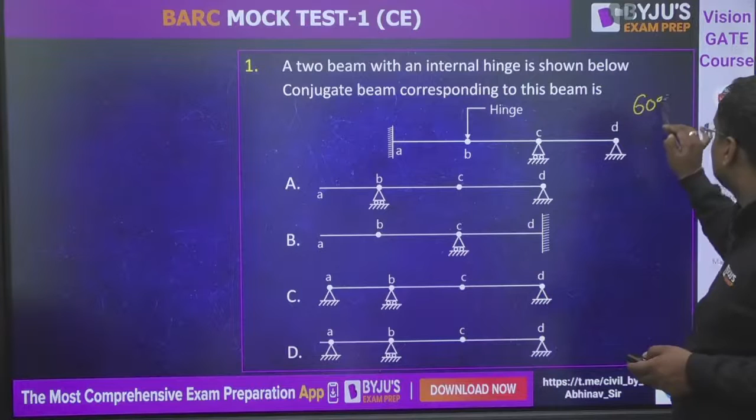Come on everyone. Two beam with an internal hinge is shown below. Conjugate beam corresponding to this beam is, what will be the conjugate beam? So guys, in the conjugate beam, fixed will be free. Internal hinge will be changed to internal roller, guys. Internal roller will be changed to internal hinge, and pin support will be changed to roller support. So A will be the correct answer, guys.

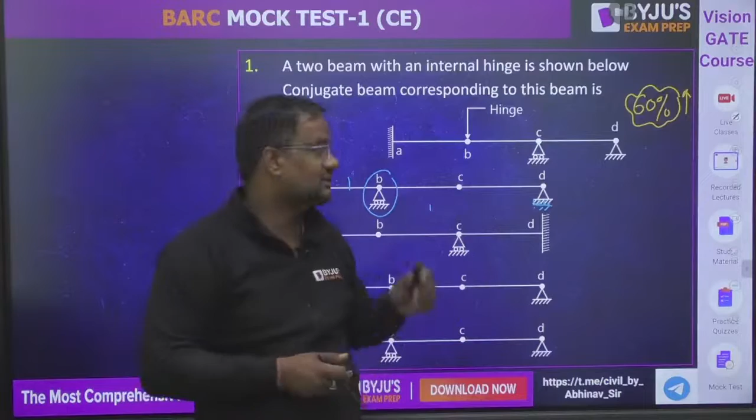Okay, now what to do from the conjugate beam, guys? Whatever the bending moment diagram, M diagram, divide by EI. So there will be M by EI diagram for this beam. Whatever is the M by EI diagram of this beam, make it as a loading diagram for the conjugate beam. Then at any point, whatever is the shear force, at the same point it will be slope in the real beam. At any point, whatever will be the bending moment, at the same point it will be deflection in the real beam, guys.

Now question number 2, and guys, let me make the statements P, Q, R and S. Option A is P and R is correct. Option B is P and S is correct. Option C is Q and R is correct. Option D is, no, it will be PQ or PS or QR or PQ. A, B, C, D option, guys.

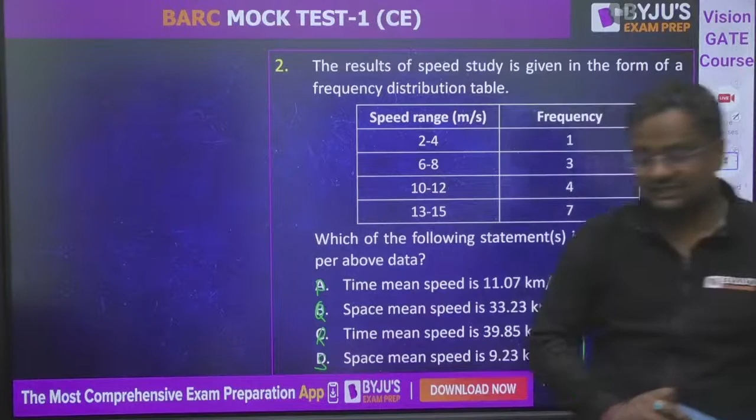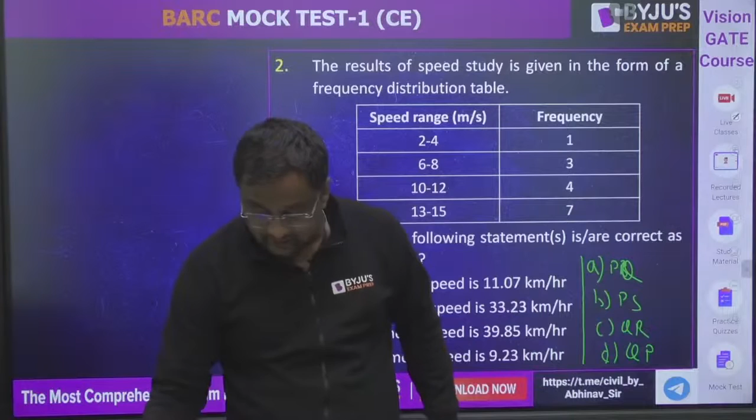Everybody on the comment section, please let me know the value of the time mean speed and the space mean speed here. You will be getting the virtual calculator in the exam as well. Aditya Vishwakarma has given the answer. What about others? And guys, in this particular question, I'm giving you a hint. Please take care of the units as well.

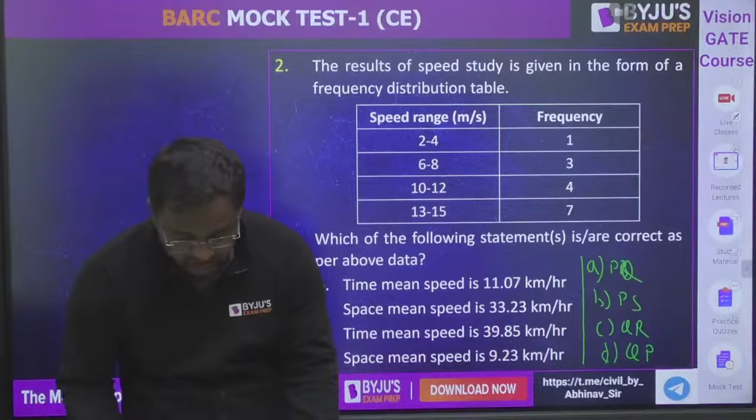So guys, time mean speed Vt: average speed can be taken here as 3, here 7, here 11, here 14. So 3 into 1 plus 7 into 3 plus 11 into 4 plus 14 into 7, divided by number of vehicles, 15. From here you will be getting the time mean speed as 11.07.

And once you got 11.07, guys, if you're opting for P, it is absolutely wrong. The reason being the values here are in meter per second. So if you change it in kilometer per hour, this value will be 39.85 kilometer per hour. So intentionally they have given 11.07. The correct value will be 39.85. That is, R is correct.

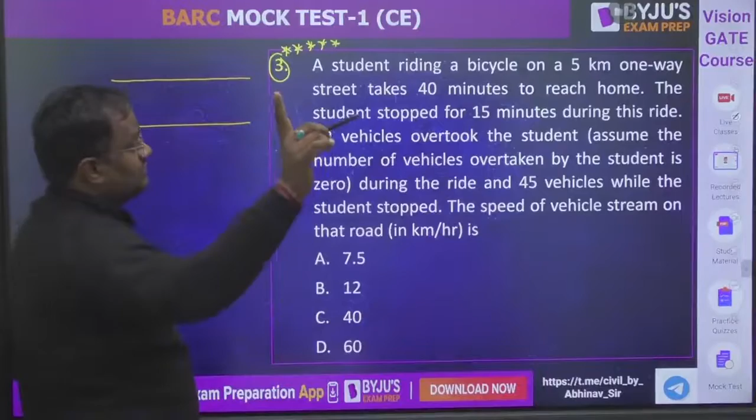A student riding a bicycle on a 5-kilometer one-way street takes 40 minutes to reach home. In this 40 minutes, what is happening? The student stopped for 15 minutes during the ride, and when he was stopped, 45 vehicles overtook him. During this 40 minutes, 15 minutes he was stopped, and in these 15 minutes 45 vehicles cross him.

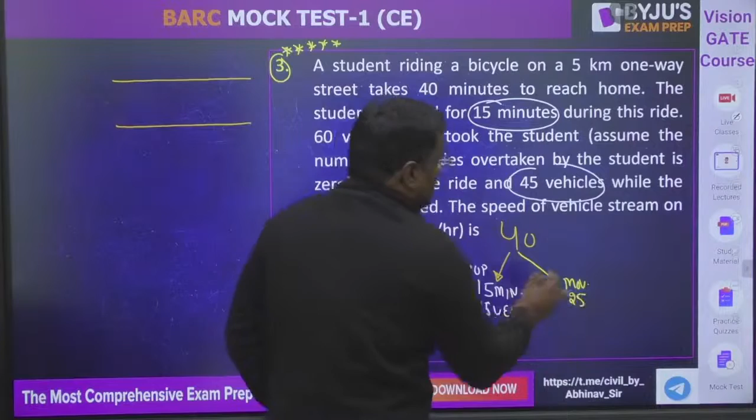In this 40-minute journey, 15 minutes he is stopped, so he is moving 25 minutes, and in those 25 minutes 60 vehicles overtook the student. Student is not overtaking anything. Of course, the traffic will be having some velocity v like this.

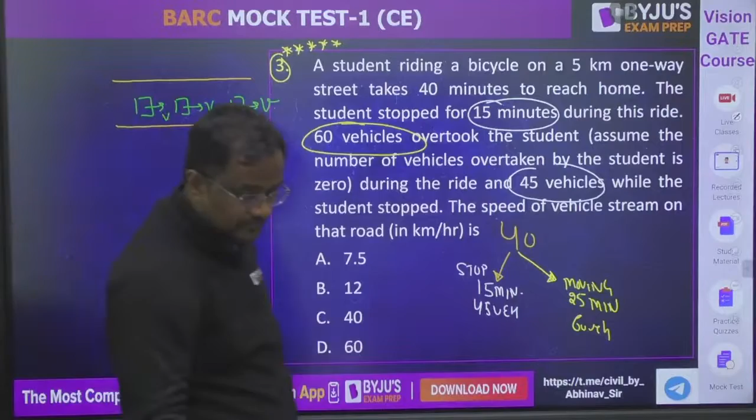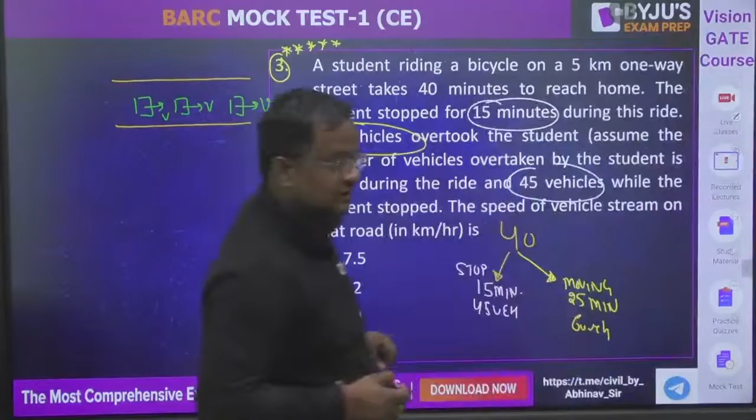Now everyone, what is the speed of the vehicle stream? Means the speed of the traffic. I'm again saying, when he was stopped for 15 minutes, v is equal to 0, 45 vehicles are overtaking him. And when he is moving for 25 minutes, 60 vehicles overtake him.

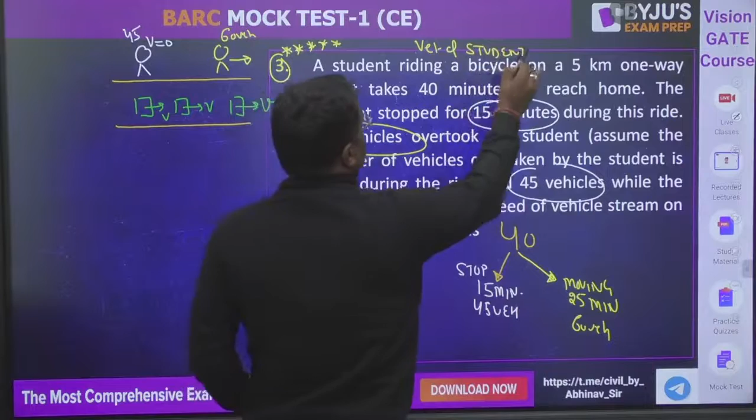What will be the speed of the student? Velocity of the student is equal to distance, that is 5 kilometer, upon time. The moving time is only 25 minutes, so in hours this will be 25 by 60. So this will be 12 kilometer per hour.

Now do this. Sandeep is saying C. No, Sandeep, C is not correct. Everyone, please tell me.

Do it, guys. This question, if you can solve now, you are champion. Champion of the champions. Come on, hit this question, guys. Come on, come on.

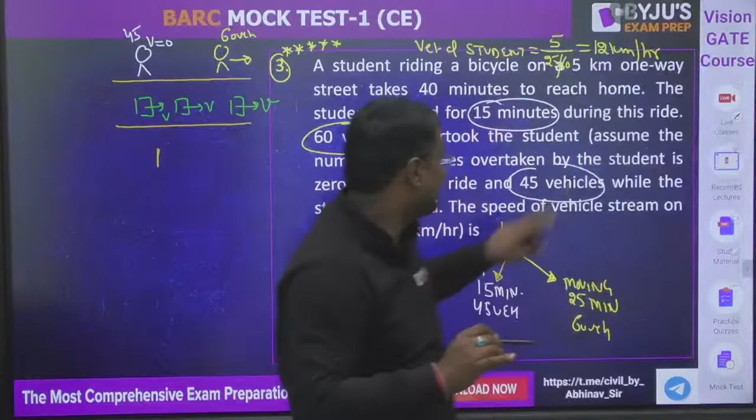B, C, B. Now you change to B. B is also, I guess, incorrect. Now see, guys, density will be same. If he is moving or he is at rest, density will be same. When stopped, and when he is moving, I have made it with yellow color. The density will be same. His moving speed is 12.

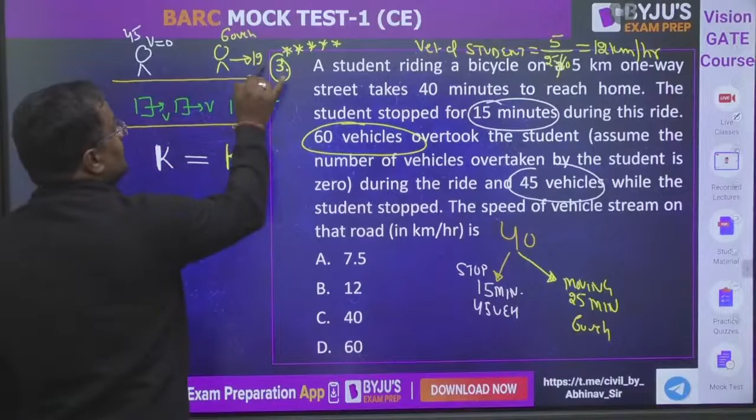So guys, K is Q by V. How many vehicles when he stopped? 45 vehicles in 15 minutes. This is Q, and this Q, number of vehicles passing, is with respect to the student. So velocity is also with respect to the student. When he is stopped, velocity of traffic with respect to him is V minus 0.

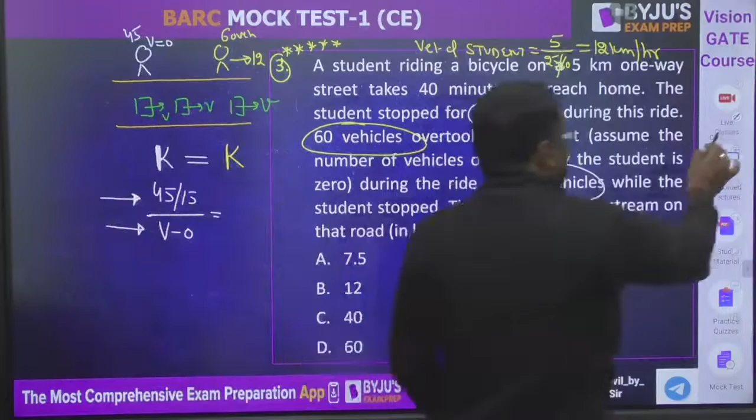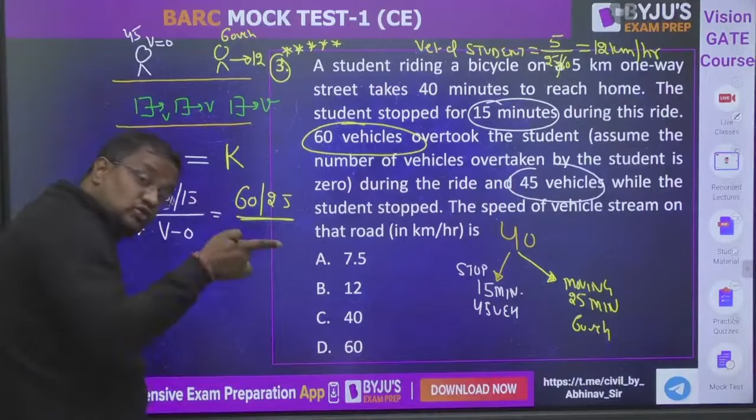Now let me write the same thing when he is moving. When he is moving, 60 vehicles overtake him in 25 minutes. Vehicle per minute will be calculated. These numbers of vehicles are with respect to the student, not a constant section. Student is moving and vehicles are crossing him. So velocity I will also represent with respect to the student, that is v minus 12.

Please check from here, guys. You will be getting v is equal to 60.

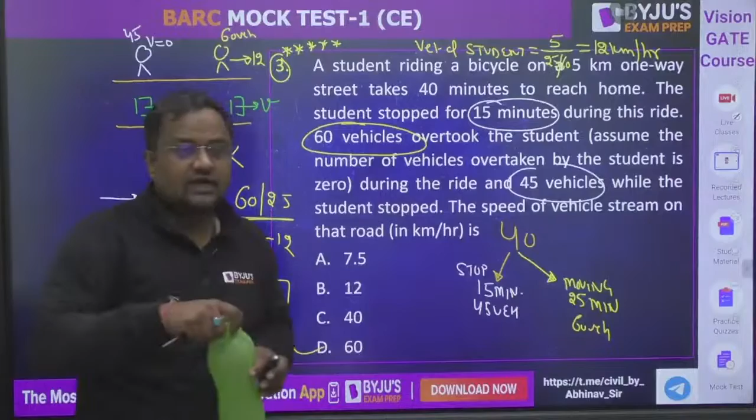Everyone, guys, give me yes or no. Have you understood this beautiful question? Come on, let me know. Any doubt here to anyone?

Any doubt here to anyone, guys? Tell me. No doubt, na? Okay, shall we move further then?

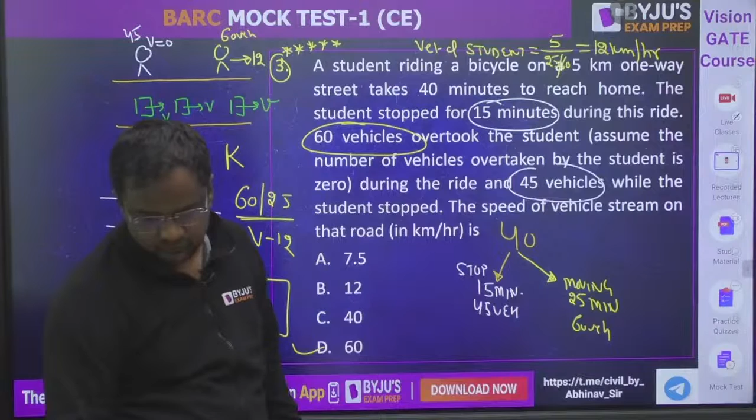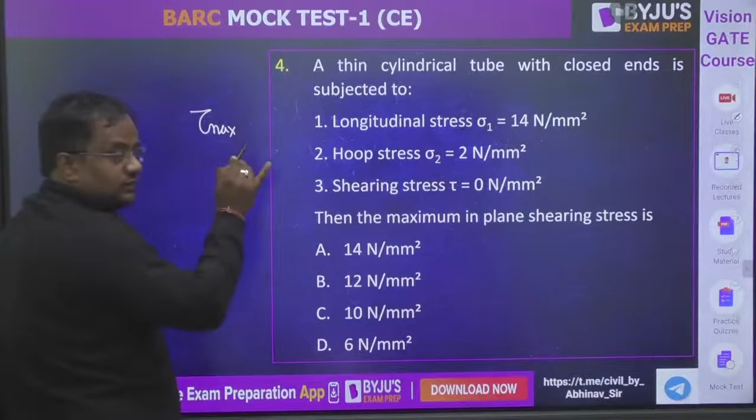Okay. This one, a thin cylinder with closed end is subjected to this. Sigma L value is given, sigma H value is given. What is the maximum in-plane shearing stress? So tau max in plane, not absolute. So in plane it will be sigma 1 minus sigma 2 by 2, sigma H minus sigma L. Sigma H is 2 and that is 14.

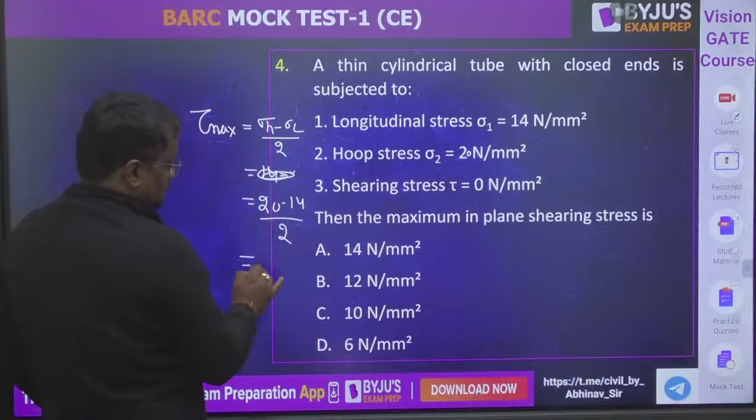Okay, so guys, how can sigma H be less? Make it 20. Okay, make it 20. So it is 20 minus 14 by 2. So 6 by 2 will be 3, guys.

Okay, next question. For the analysis of thick, guys, thin can be done from simple derivations. Everything, sigma H, sigma L, tau max, epsilon H, epsilon L, volumetric strain, everything is derivable. For analysis of thick cylinder, we have to make certain assumptions and certain empirical equations that are given by Lame's theory, where Lame's constants A and B are also introduced.

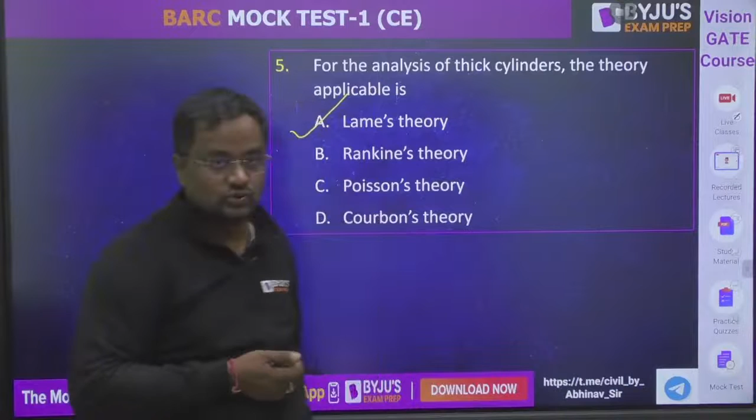Give me yes or no, everyone. Any doubt, please let me know, friends. No doubt? Shall we move further?

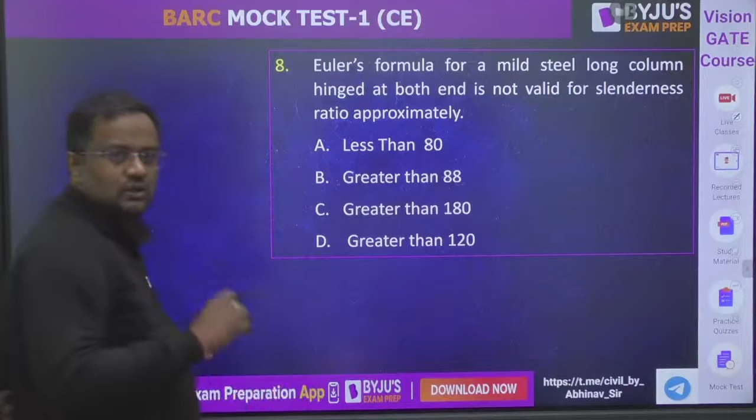Okay. Euler's formula for mild steel long column hinged at both ends is not valid for what slenderness ratio? For how much slenderness ratio is it not valid, guys? Okay, guys, 86, 88 is the value. Lambda is equal to L effective by R minimum. If you apply it for long column, for validity of Euler's theory, the buckling stress should be less and crushing stress should be more, na? If buckling stress is less, that means the buckling is reaching early, na?

So when you apply this, the value comes around 88. For longer lambda, means long column, it is valid. The condition is only not valid for lesser lambda. It should be less than 88, and 80 is the answer because all others are greater. For greater value, it is more long column. More slenderness ratio, more long column, more the chances of buckling failure. So only A is the correct answer. Got it? Everyone please let me know.

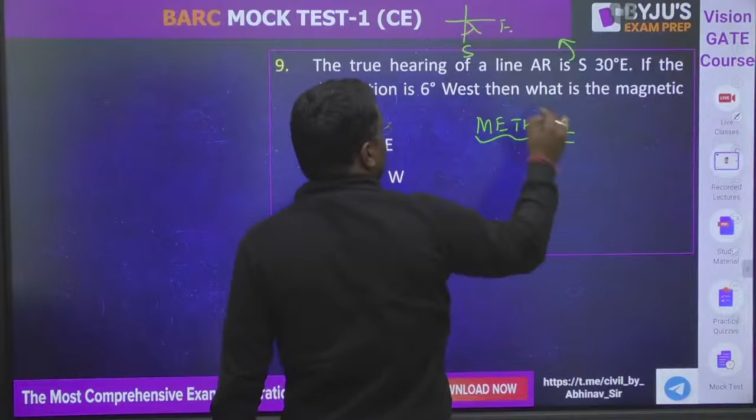Okay. Question number 9. The true bearing of a line is S 30 degree east. If the declination is 6 degree west, what is the magnetic bearing? There are two methods for solving this; many times I told you these two methods. One is the one everyone tells you. S 30 degree east: from south it is toward east 30 degrees. So that is 150. So 150 is true bearing. You have done this method many times.

For the line AR, from the true meridian, the angle is 150 degrees. Now the declination is 6 degree west. So magnetic meridian is 6 degrees west. That angle is 6 degrees. So from here the value will be 156. If this is 156, what will be this value? 180 minus 156 is 24. So S 24 east. This is one method, which in every book is the solution.

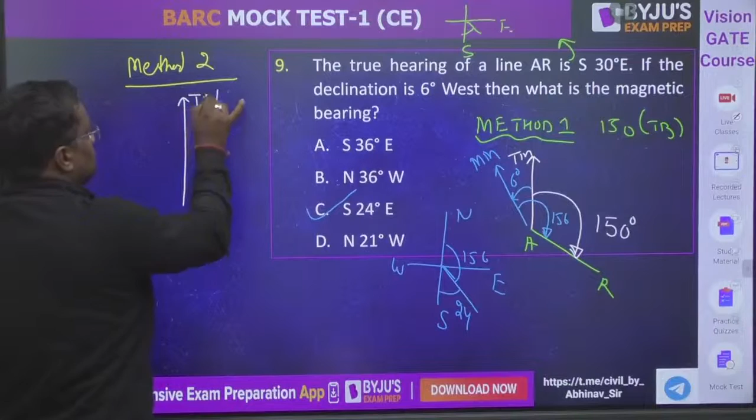Let me give you the second method. My method, Abhinav Negi method. Method 2: no need to convert to whole circle bearing. From true meridian, this is true north, this is true south, this is true east, and this is true west. What is this? S 30 degree east.

S 30 degree east. Declination is 6 degree west. So magnetic meridian or magnetic north will be here. That is 6 degree. Considering that magnetic north, it will be south. This will be east, and this will be west. And this is 6 degree, vertically opposite angle. This will be 6. And now from magnetic meridian, it is towards here, and that will be 24.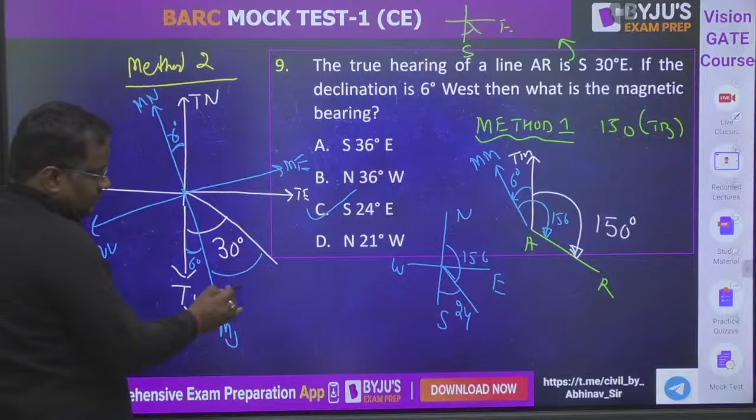Got it, guys? Directly you can get the answer.

Everyone on the comment section, guys, give me yes or no. Give me yes or no. Everyone, guys, come on. Any doubt? Shall we move further?

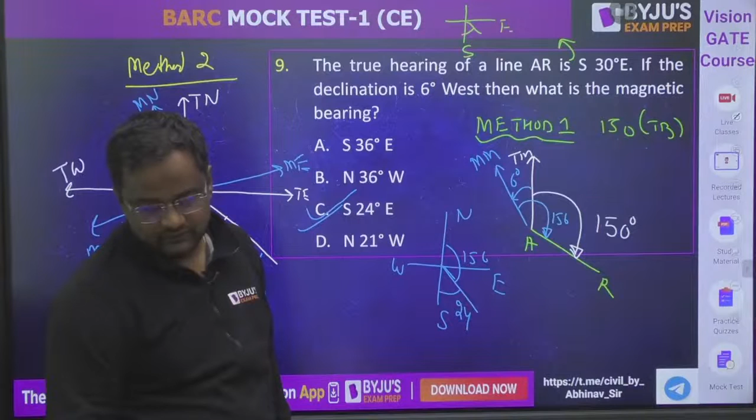Okay. Diurnal variation is greater in summers than winters, greater in day than in night time, and greater in poles than equator. Everyone will tell you this, every teacher. But what is the logic?

Guys, the magnetic variation is coming due to the movement of iron, which is generally in molten form in the earth crust. And that movement will be more in high temperature, because high temperature decreases the viscosity of liquid. And high temperature will be in summers, not in winters. High temperature will be in day. So it is more in summers than winters because of high temperature, more in day than night.

Then why poles? Because at the pole, the curvature is more. Slight movement of the earth or the rotation will lead to large movement of the molten form. Near the equator, the curvature is almost smooth, plain, so movement will not be much. So that is why it is greater not in night, not in winters, not in equators; it is more in summers than in winters, guys.

Have you understood? Have you understood, guys? Tell me please.

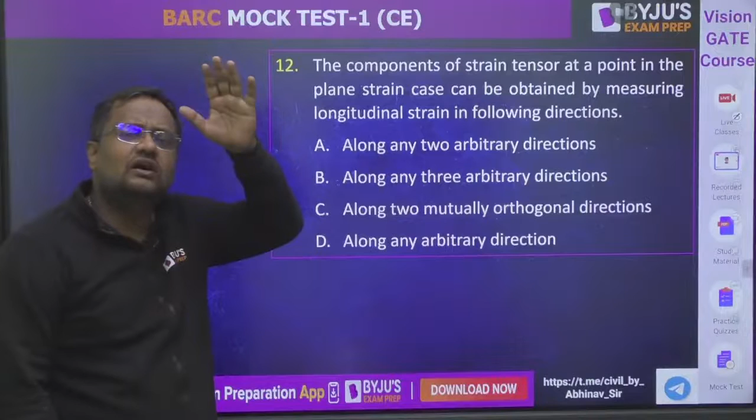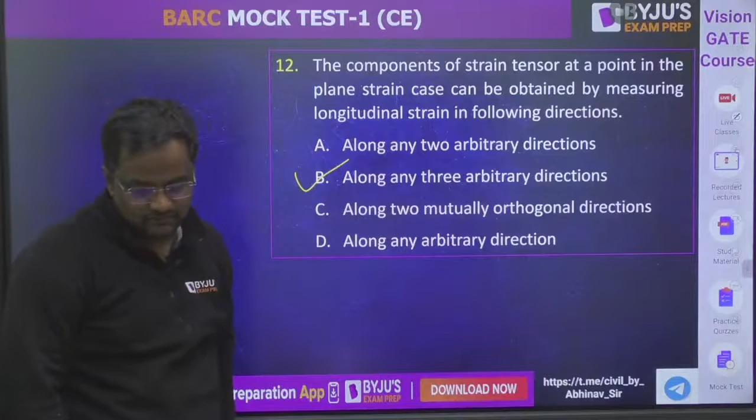Okay. Do this homework. D will be the answer. Now the components of strain tensor at a point in the plane strain case can be obtained by longitudinal strain in any three directions. It may be two of them at 90 degree and the third one at 45 degree, rectangular rosette, but that is a special case. At 60 degrees, equilateral triangle, or star rosette at 120 degree, but they are special cases. Actually it can be along any three arbitrary directions. Okay, you can find the values.

Okay guys, good. If epsilon x is the maximum engineering strain, what is the maximum shearing strain? This will be epsilon, this will be gamma by 2. Mohr circle for strain will be like this. This is epsilon x, this will be epsilon y. What is radius here? Radius is diameter by 2, but radius here is not tau max like in stress. Here the y-axis is gamma by 2.

So gamma by 2 max is equal to epsilon x minus epsilon y by 2. So from here gamma max is equal to epsilon x minus epsilon y. B option, guys. Yes Sandeep.

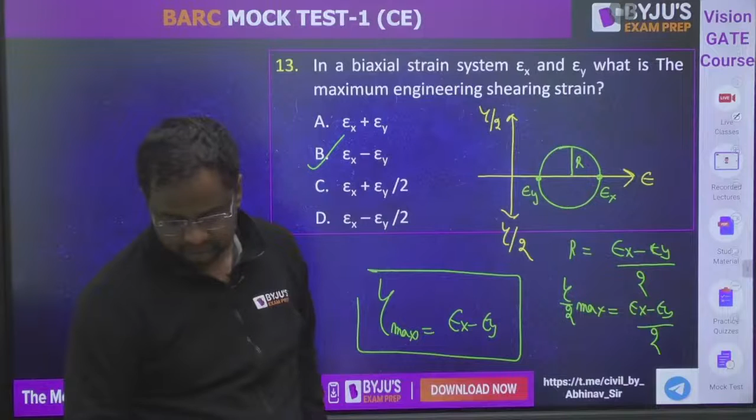Sandeep has deleted now. Any doubt guys till here? Please tell me. Till here any doubt? Tell me.

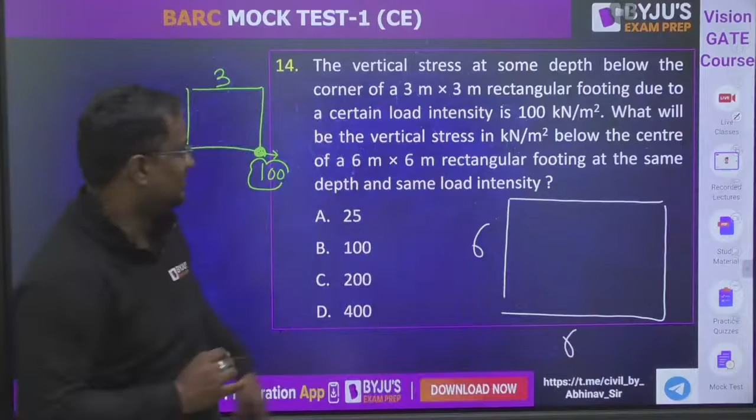Okay. The vertical stress at some depth below the corner of a 3 into 3 footing is 100. What will be the vertical stress below the center of a 6 into 6 rectangular footing? 6 into 6 will not be rectangular, yeah, 6 into 6 will be square. So for this 6 into 6, we want it at the center.

So 6 into 6 consists of four 3 into 3s: 1, 2, 3, 4. Due to this 3 into 3 corner it is 100, due to this corner 100, due to this corner 100, and due to this corner 100. So total will be 400 guys. Total will be 400.

Hi Ajay, how are you? Tell me please. Everyone on the comment section. Come on. Getting it?

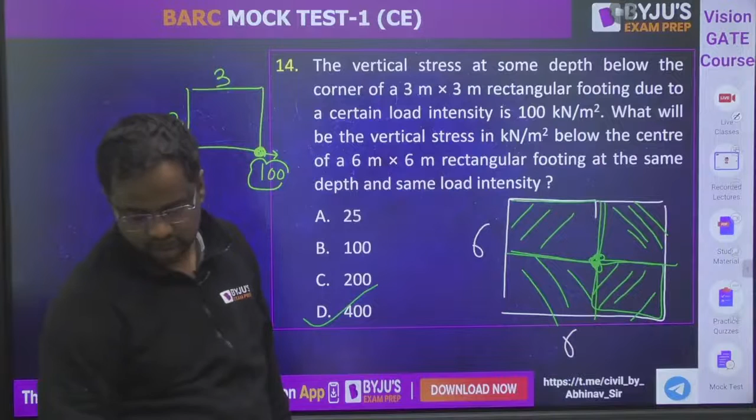Getting it? I'm good, I'm good. Okay, take this question as homework again.

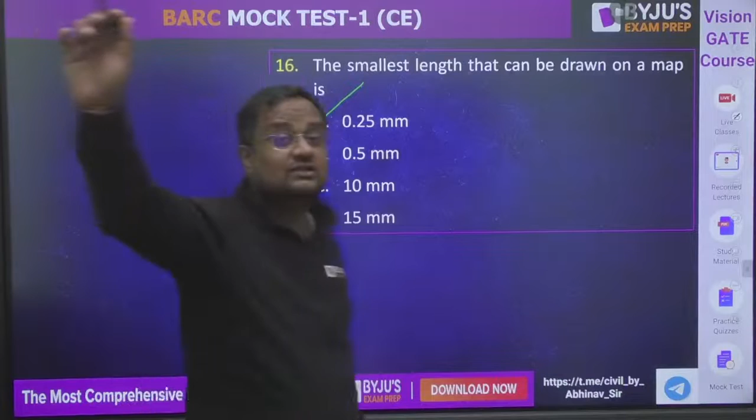The smallest length that can be drawn on a map. Okay guys, the nib with which we make the pencil map is considered to be 0.25 mm width. Okay, this is the smallest distance. Smaller than this we cannot denote on the map. They will be very, very close. Okay, suppose the scale is 1 by x. So 0.25 mm on map, what will be the ground distance?

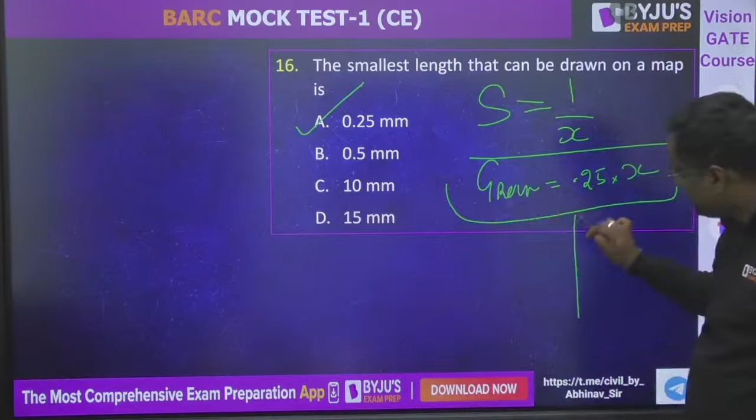0.25 into x. So on ground, this is the minimum distance we can show, because this is the minimum distance in the map. Now that means if 2 points A and B on ground have a distance less than 0.25x, there is no need to distinguish these 2 points, because in the map it is less than 0.25 mm. That means we cannot show those 2 points differently in the map. So no need to take the distance, guys.

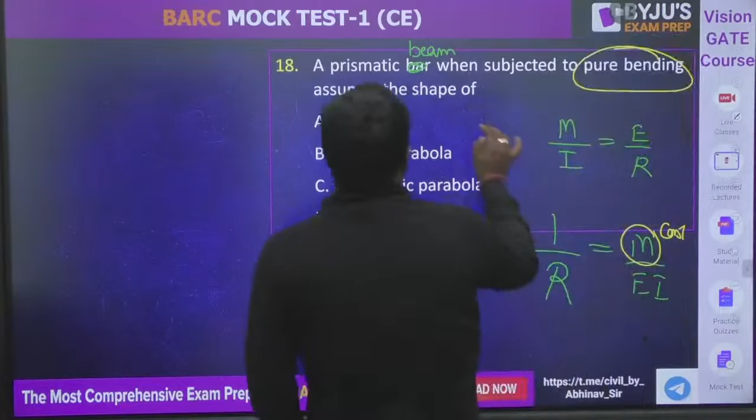Okay. Guys, a prismatic bar, a beam, when subjected to pure bending, what will be the shape? M by I is equal to E by R. So 1 by R is equal to M by EI. Now it is pure bending, so M is constant. The beam is prismatic, which means EI is constant. So 1 by R is constant. R is constant means a circle, guys.

Everyone, got it? Got it, friends? Ajay, Sandeep, Kumar, everyone got it?

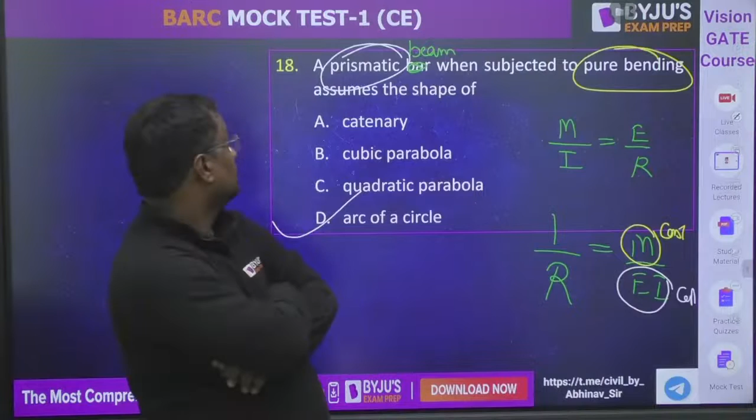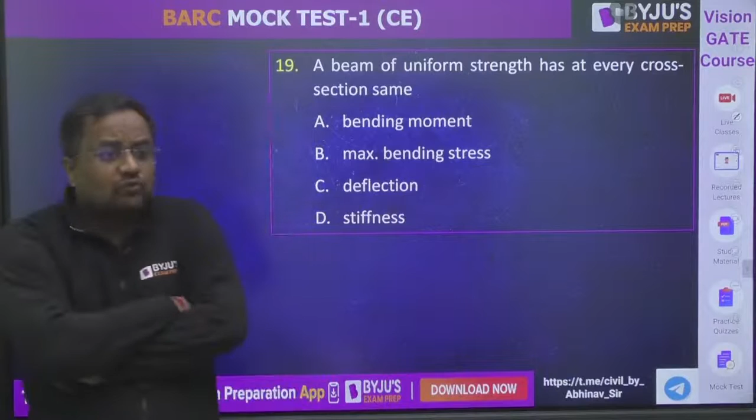Okay. 19. What is the meaning of uniform strength? Sometimes in the question they say the beam is of uniform strength. What does that mean? Equal amount of punching is required to fail it? Equal amount of energy is required to crack it? Beam of uniform strength means that the maximum bending stress value is the same.

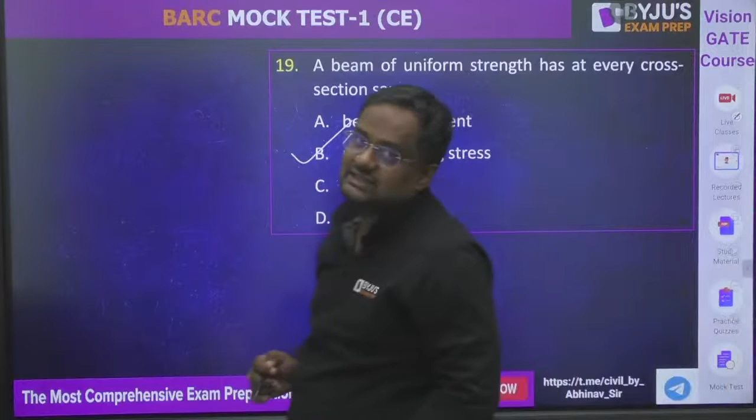Okay. What is M by EI? We just told you, M by I is equal to E by R. So from here, M by EI is equal to 1 by R. 1 by R is curvature, so M by EI is also called curvature.

Which of the following is the water content of a mixed soil made from 1 kg of soil A with 100% and 1 kg of soil B with 50%? Okay. Mixed soil. So first of all, A soil: weight of water plus weight of solid is 1 kg and water content is 100%, so weight of water by weight of solid is 1. So from here, weight of water is 0.5 and weight of solid is 0.5. From these two statements, we get this value.

This is A. Now in A, B is mixed. So what is B? Weight of water plus weight of solid, total is 1 kg, air weight is 0. And weight of water by weight of solid is 0.5. From these two, what do I get?

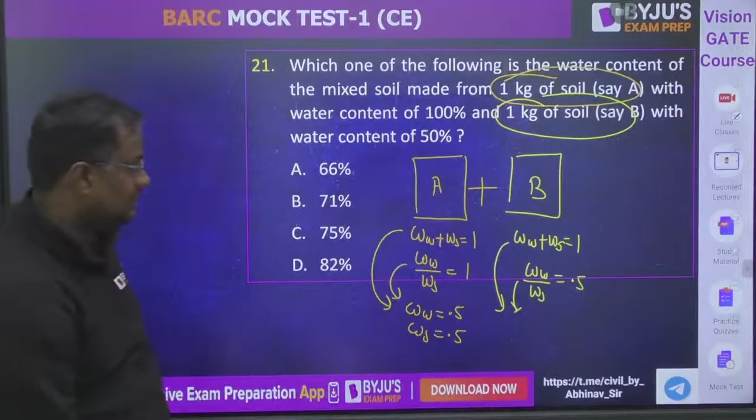Mixing yellow and this orange, we get C soil. Now in C soil, what is the water content? What is the weight of water in C soil? Weight of water is 0.5 plus 0.33, 0.83, and weight of solid is 0.5 plus 0.66.

1.16. Okay, so water content of C soil is weight of water 0.83 upon 1.16. What value does this come to?

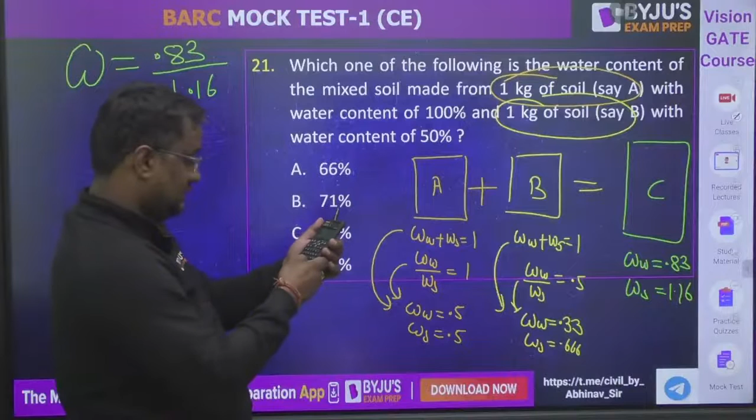0.83 divided by 1.16, this value is coming to be 0.71, that is 71%.

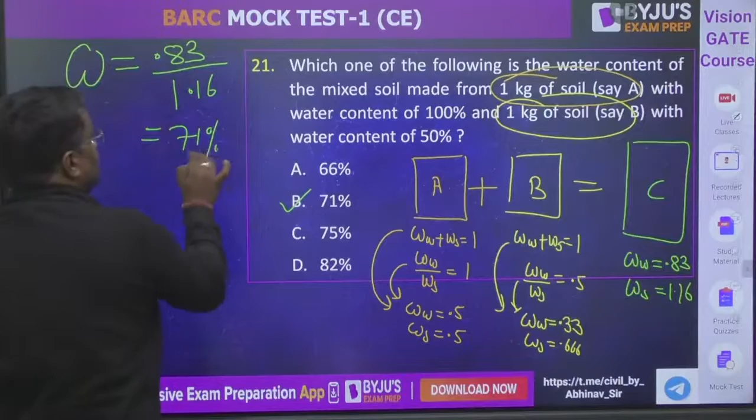Give me yes or no. Have you understood the topic? Have you understood the question? Please tell me, please tell me.

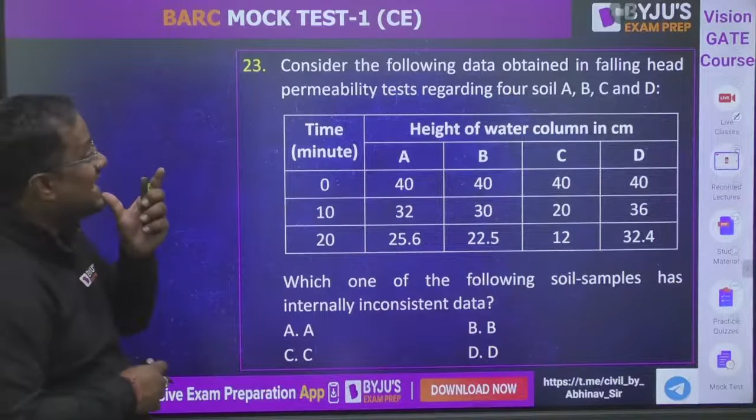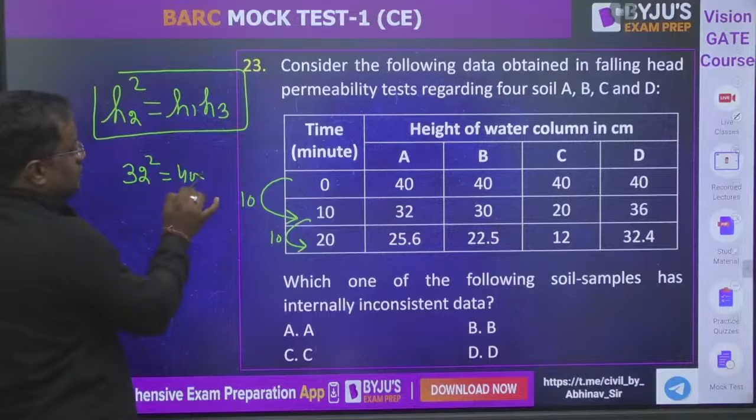Which of the following is inconsistent data for a falling head test? In a falling head test, if the time interval is equal, this is 10 minutes and this is also 10 minutes, then h2 square is equal to h1 into h3. So please check, 32 square is equal to 40 into 25.6. If yes, then consistent, if no, then inconsistent.

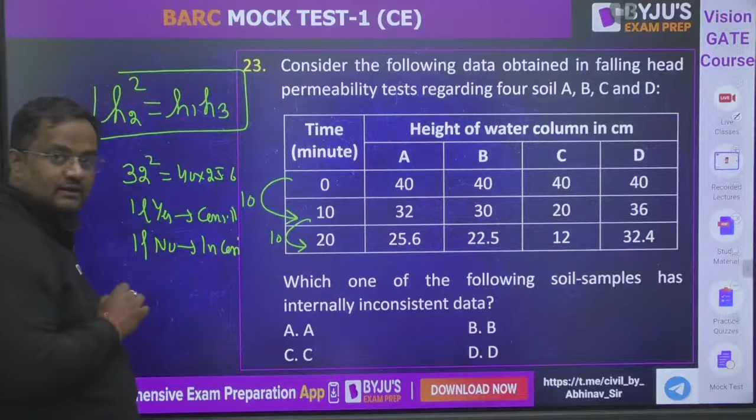As far as remembering, you can check this for same. Here it is not matching, so C will be the answer. 20 square is not equal to 40 into 12, this is 400 and this is 480. Others will be matching, so that one will be inconsistent, all others will be consistent.

Yes, yes, Ajay, correct. Correct. Correct.

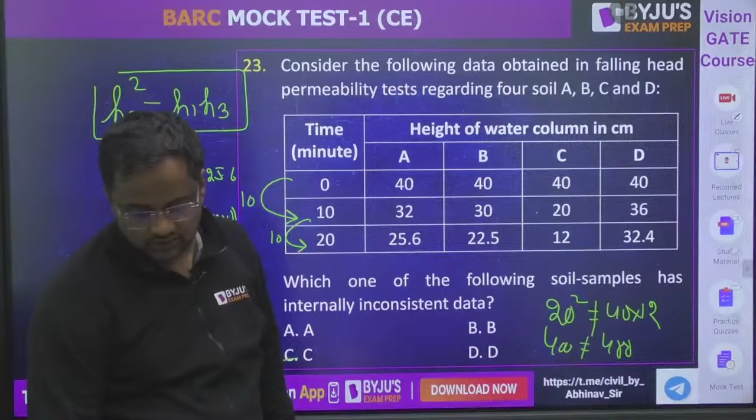Get till here, any doubt you can ask me. Till here any doubt, you can ask me.

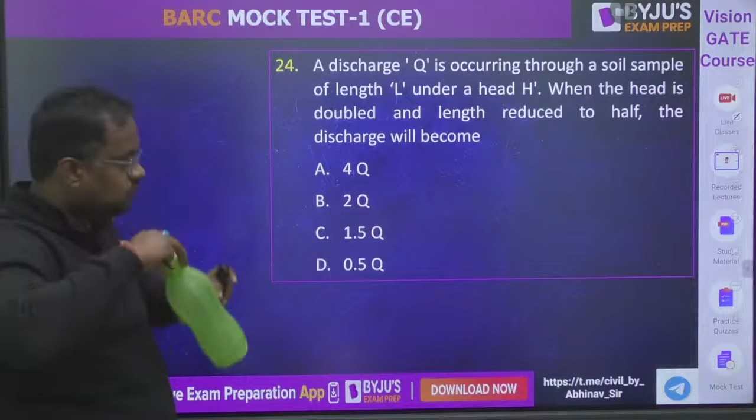Now next question, a discharge Q is occurring through a soil sample of length L under a head H. Now when the head is doubled and length is reduced to half, what is the discharge?

Q is equal to KIA. Now when the head is doubled, that is 2 times, and length is halved, so it will be 4 times of Q. It will be 4 times of Q guys.

Now what should be the pH value? It should not be less than 6. Not the environment one, I am talking of RCC, the water we use to make reinforced concrete should not be less than 6 pH.

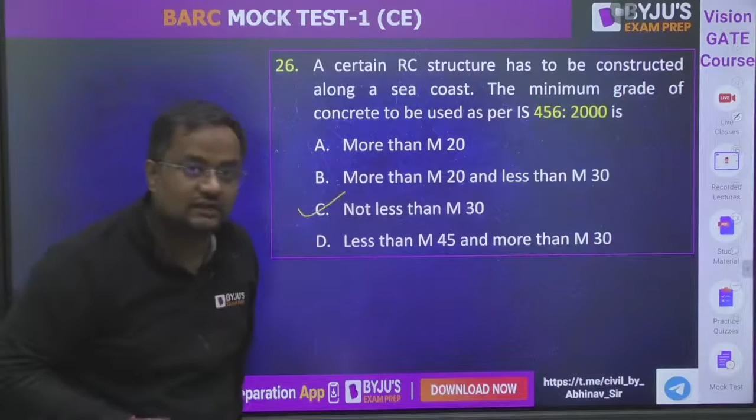The minimum grade of concrete will be not less than M30 for reinforced concrete. The minimum grade of concrete should not be less than 30.

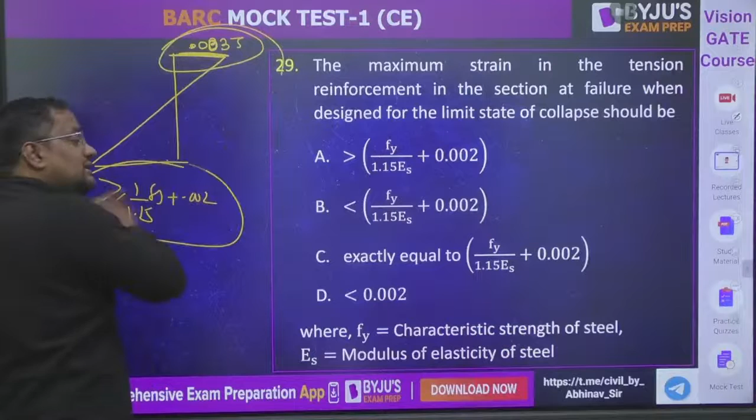Fy by 1.15 Es plus 0.002 from the offset method. This should be more. Guys, I don't want strain in steel to be involved that way, I want strain in the steel to also be less. But when concrete is reaching the maximum, steel strain should be more than that, so it is failing first. So that is a ductile failure.

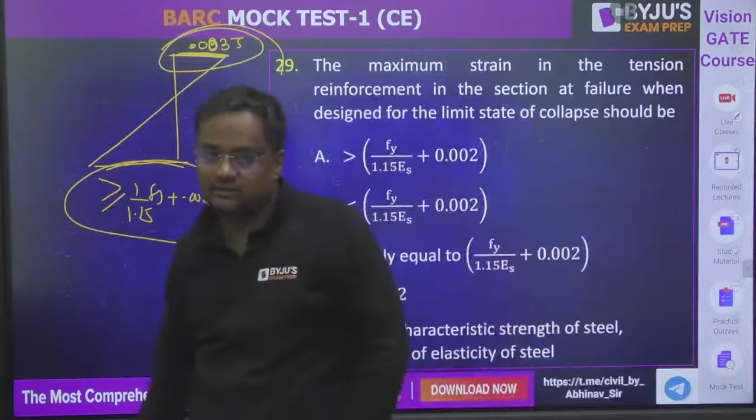Guys, this is a very, very important point in RCC that students are not getting it. I cannot say misguided, but they are not getting it. We generally say the steel strain should be more than this value, this is the correct answer, but that doesn't mean we want strain in steel more. We want strain in steel to also be less.

What we say is that when concrete is reaching the maximum value, steel should be more than that, so that first stress should be in the steel. Now the Young's modulus is 5000 root FCK.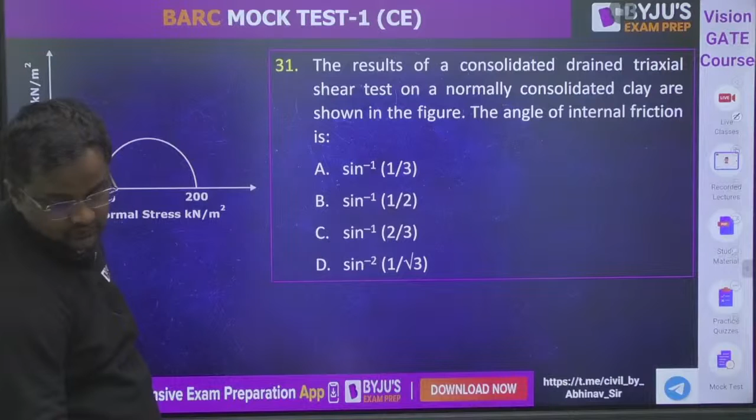Now, what is the value of the angle of internal friction? Consolidated normally consolidated clay behaves like sand, C is equal to 0.

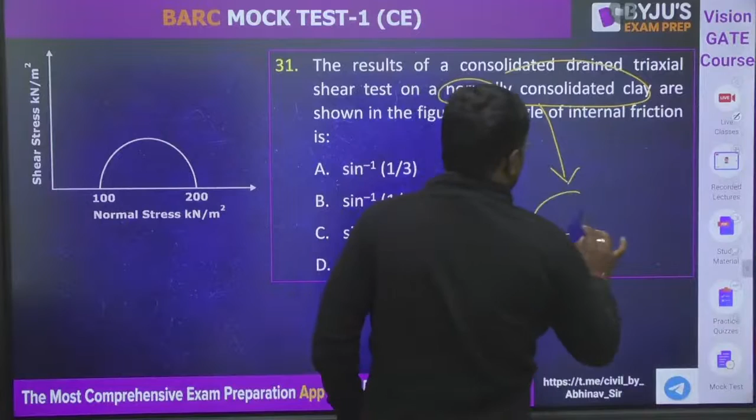So the graph starts from here, and this is phi. So this is 150, radius is 50. So sine phi is equal to perpendicular by 150, so it is 1 by 3, it is 1 by 3 guys.

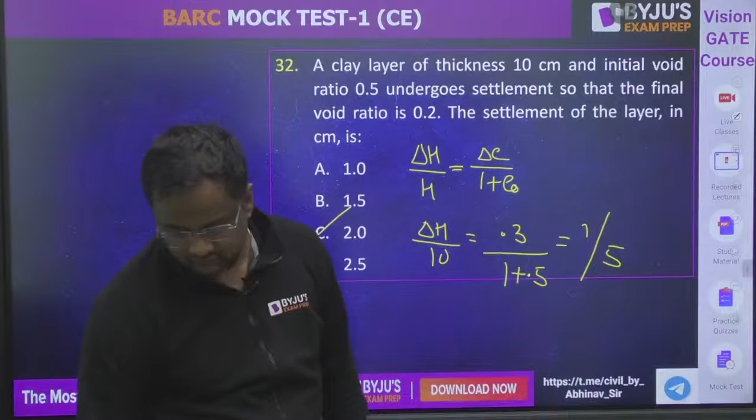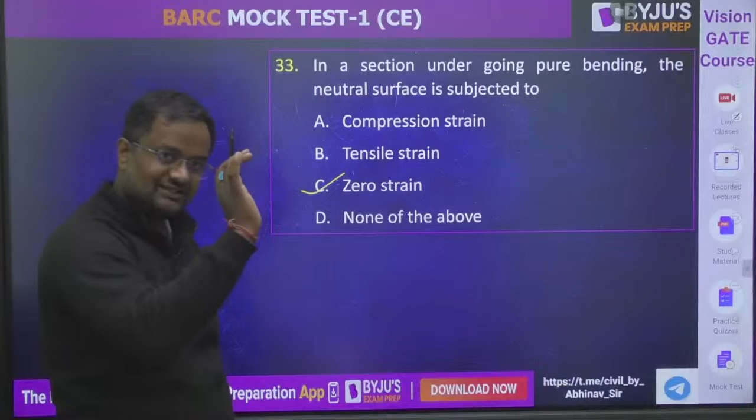In a section undergoing pure bending, the neutral surface is subjected to zero strain. Above the neutral surface it can be compression, yes in this case it is compression above. But for hogging moment, it can be tension also.

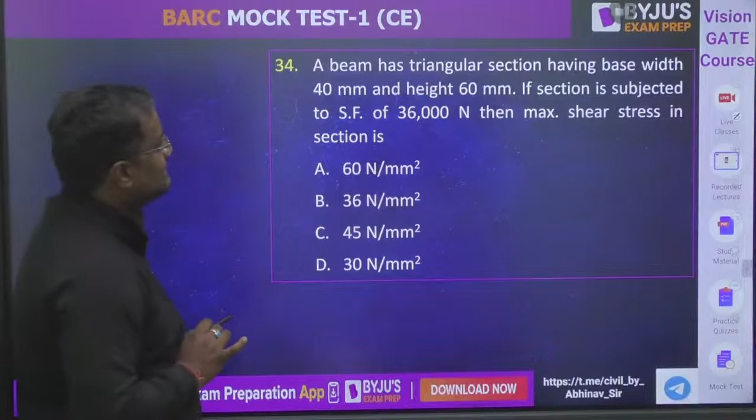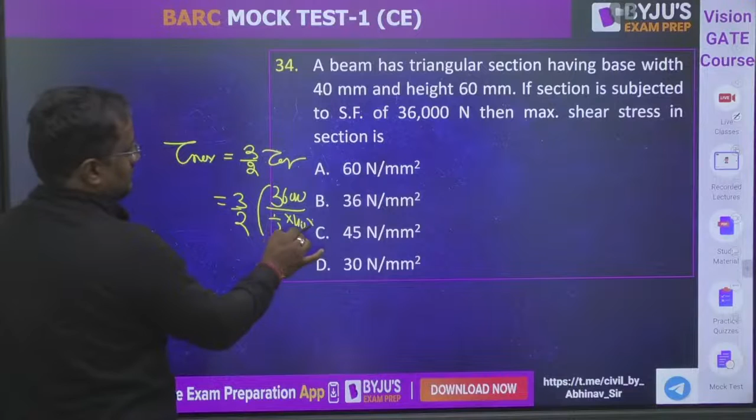The maximum shear stress in a triangular section: tau max is 3 by 2 of tau average. What is tau average? Shear force 36000 upon area, half base into height, 40 into 60. This value will be coming 45.

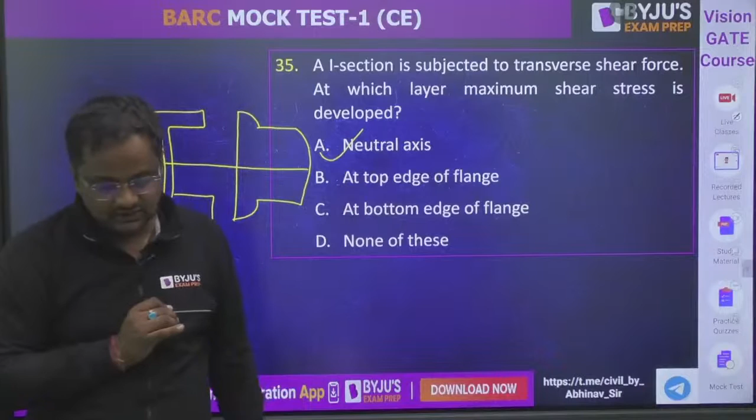When an I-section is subjected to a transverse shear force, it is like this: area is reducing, stress will be increasing. The maximum shear stress is at the neutral surface.

Guys, whenever you are making a shear stress diagram, just remember two things. First, shear stress at top and bottom will be 0, and there is a parabolic variation like this, note, convex outside. Just apply logic after that. Only two things to remember for any section - I, T, L, triangular, circular, rectangular: top and bottom should be 0, and then parabolic variation, convex outside. If area is reduced suddenly, stress is decreased, then parabolic variation.

Sorry. Area is reduced, so stress will be increased, like this, and then like this. Okay, option A.

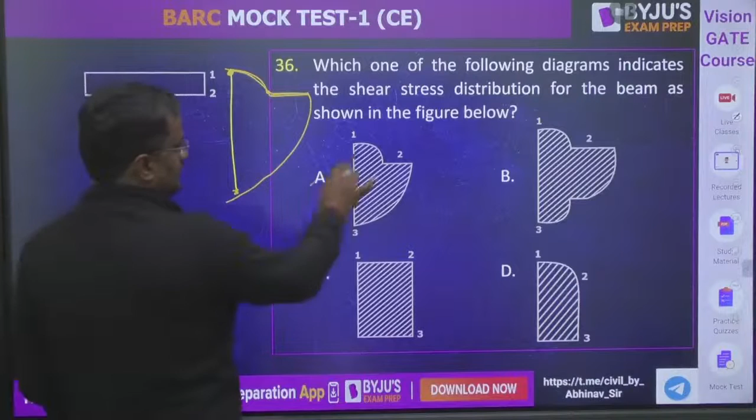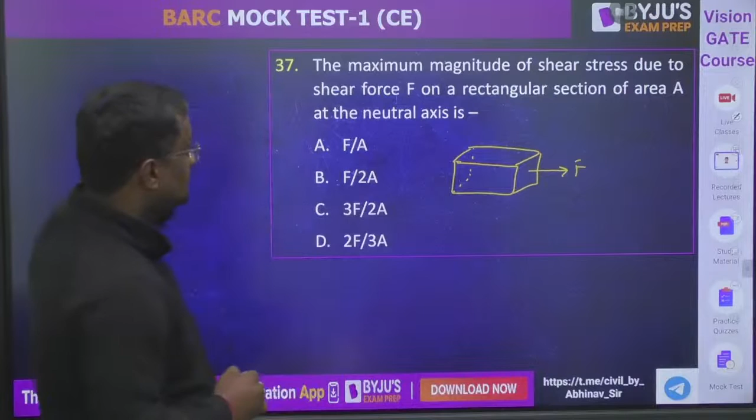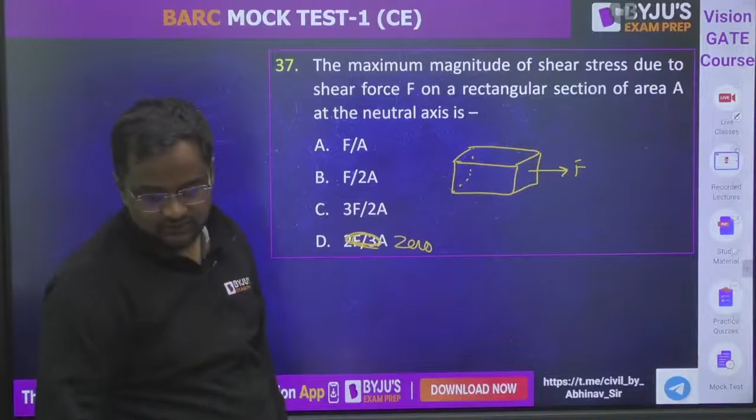Guys, this is F. What is the magnitude of shear stress? It will be 0. It will be accelerating, force by mass. Stress comes only when it is like this. Leave this - the question is asking that for shear force F, for that particular diagram the answer is 0. The normal stress will be 0, shear stress will also be 0, there will be acceleration, no stress will be coming.